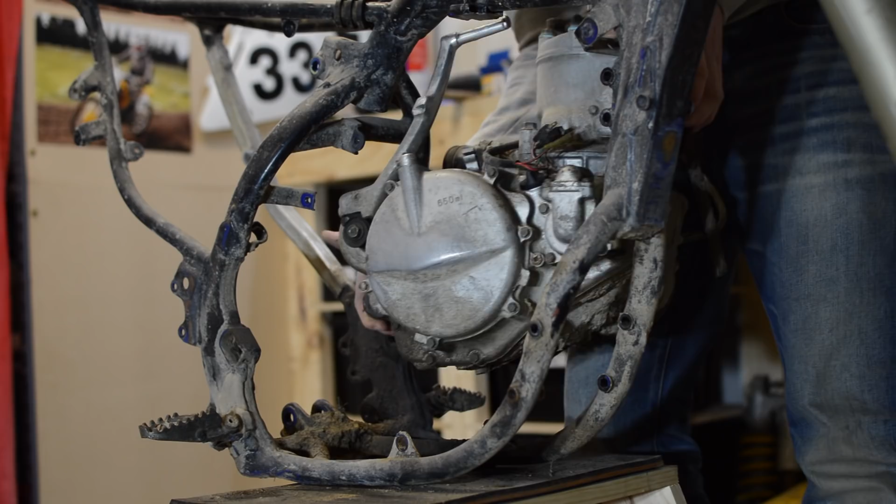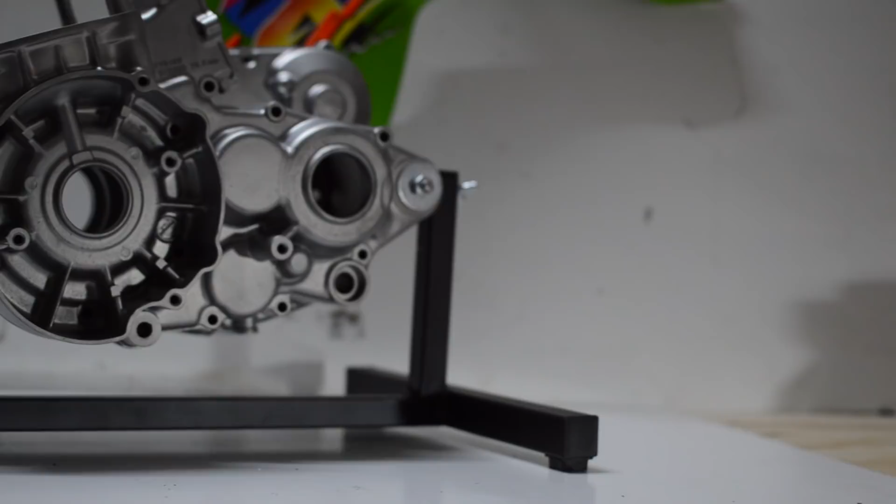In previous videos, the RM250 engine was removed from the bike, cleaned and stripped down for assessment. The cases were hydro-blasted and a bunch of new parts were ordered. A new engine stand was also fabricated specifically for this build. In this video we'll begin the assembly process, starting with the bottom end. Let's get started.

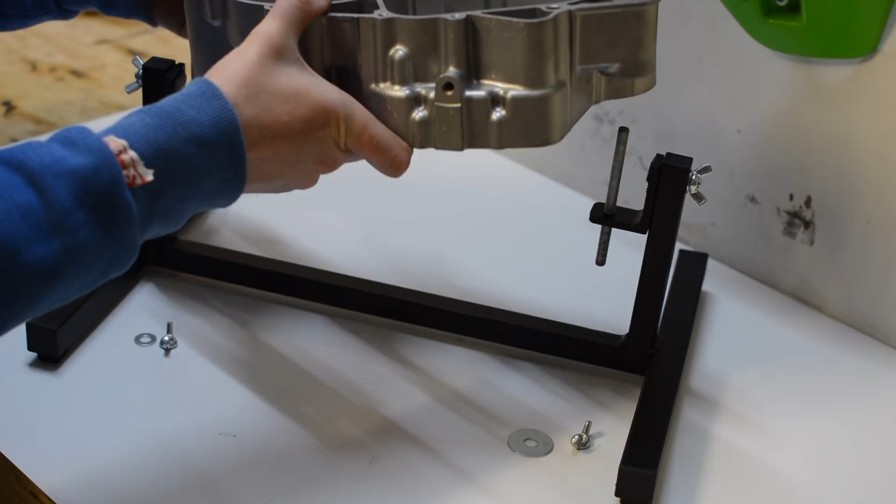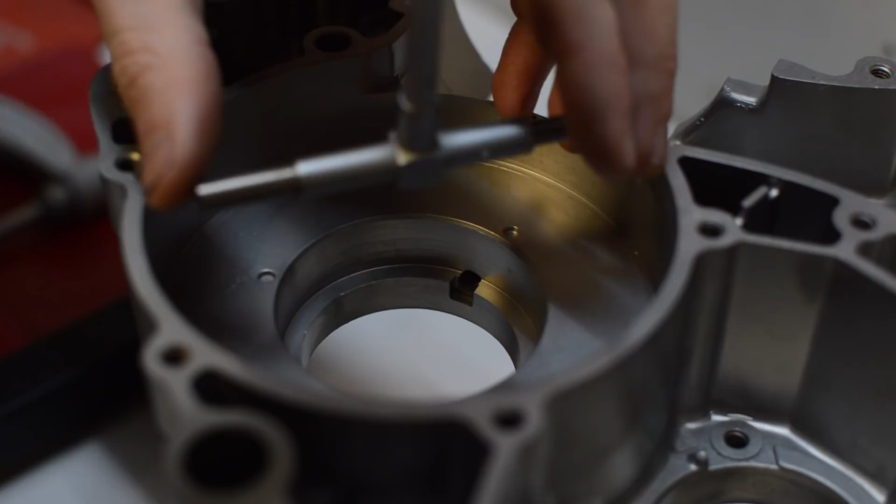Before any of the rotating assemblies can be installed, the bearings need to be fitted to the cases. Most of the bearings are an interference fit. That means that the bearing diameter is slightly larger than the case, but that's under normal temperatures. If we heat the case to expand it and cool the bearings to shrink it, we should get a clearance fit, allowing the bearings to be installed without damage.

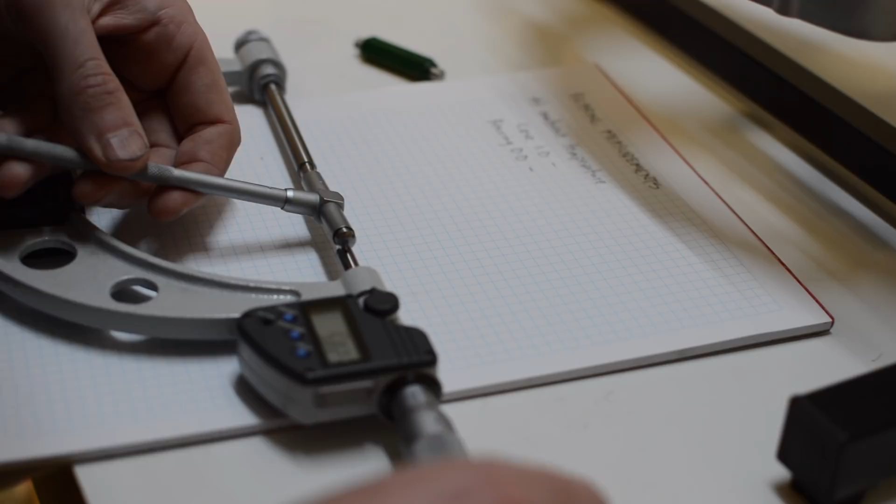I thought I'd take some measurements to prove this theory. At normal ambient temperature, the main bearing housing measures 61.950mm.

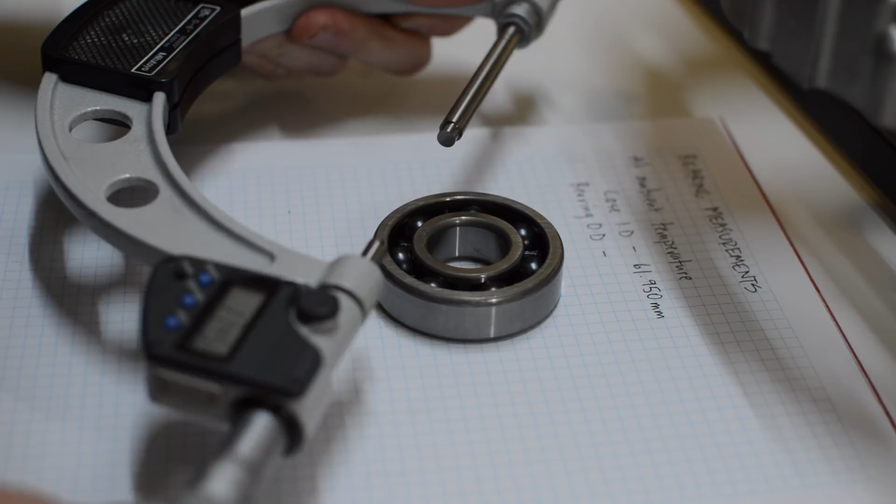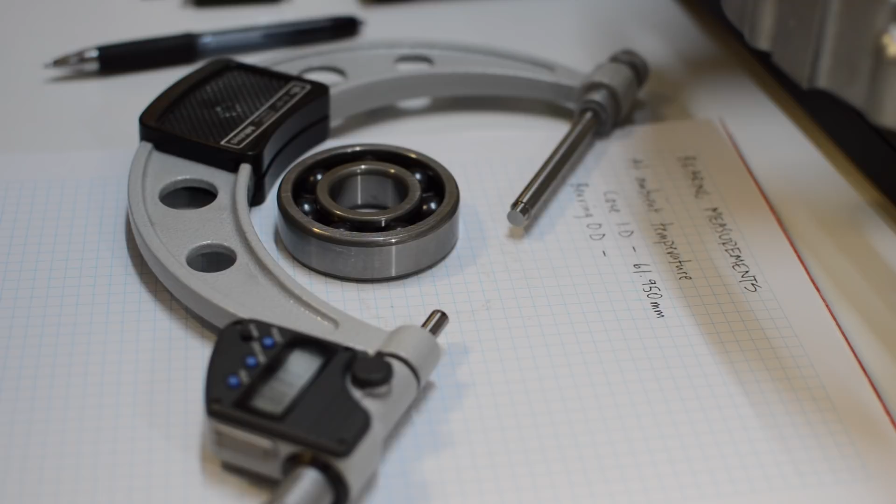A new main bearing measures up at 61.987mm. As expected, there's an interference fit. The bearing is 0.037mm larger than the housing.

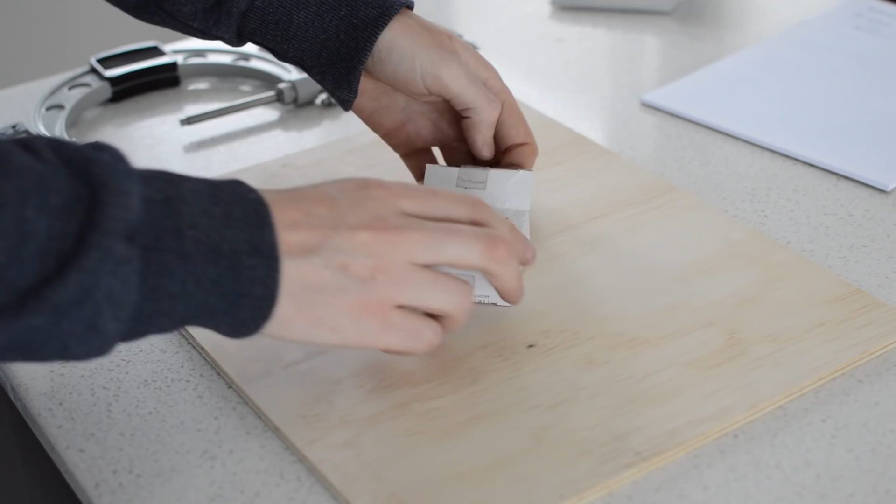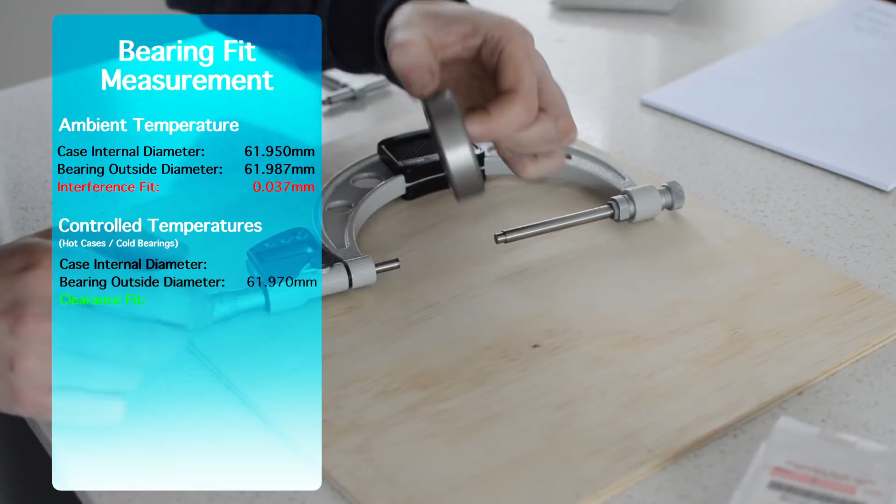After an hour or so in the freezer, I'll take another measurement of the bearing diameter. And this time it's smaller, 61.970mm. It's shrunk ever so slightly, by under 0.02 of a millimetre. And now it's time to heat the cases in the oven, and it's also a good time for a lunch break.

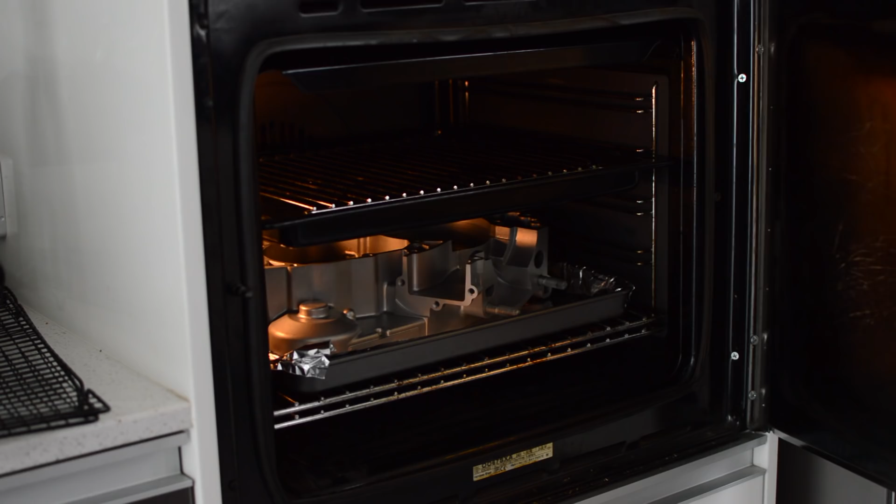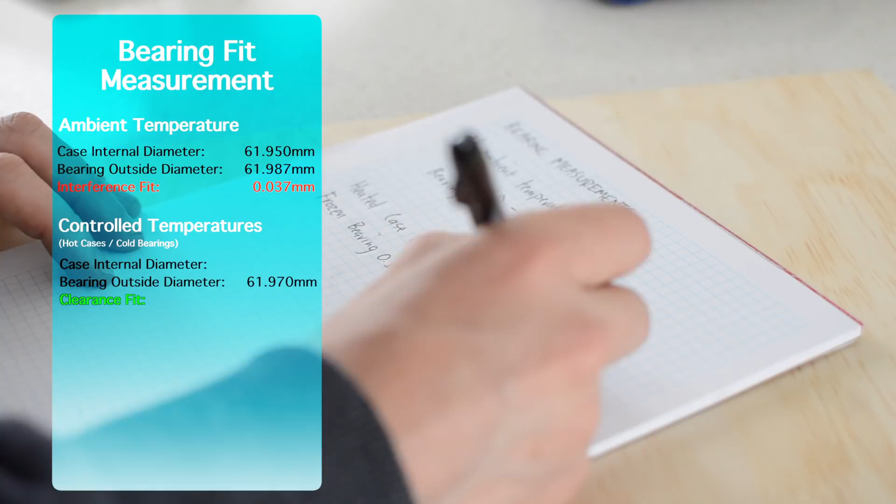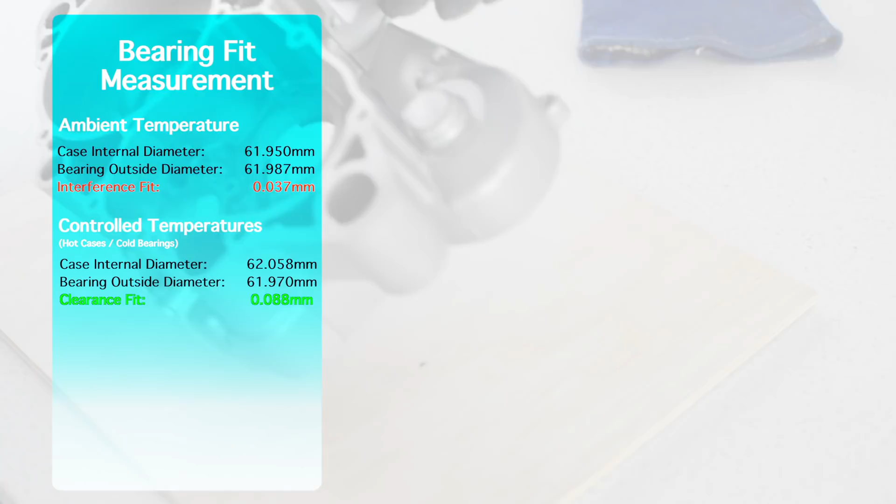Using the oven gently heats the whole case, preventing warpage. I measure the housing in the same way as before, but this time the risk of getting burnt is much higher. At about 100 degrees Celsius, the case measures 62.058mm, a decent increase of over 0.1mm. And that gives us a final clearance of 0.088mm, enough for the bearings to simply drop into place.

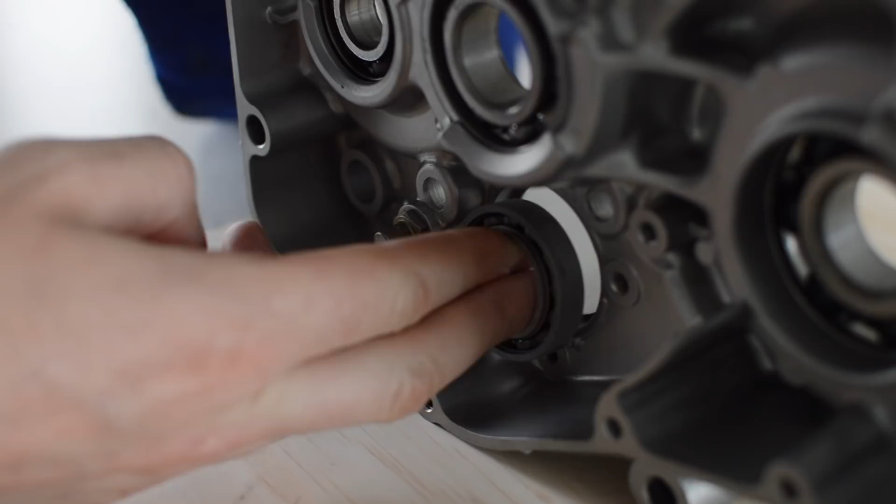Back in the garage, the right-hand case is mounted on the stand, ready for the crankshaft and gearbox to be installed. But first, all of the bearings are pre-oiled.

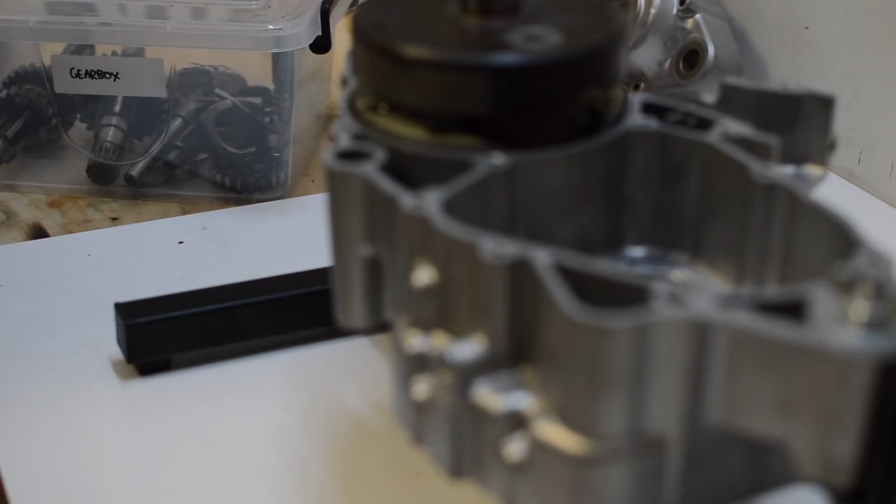Off camera, the crankshaft, along with all of the other reused parts, are thoroughly cleaned before installation. From here, assembly is just a matter of reversing the disassembly process. Care is taken to make sure everything is clean and tidy, and that everything is aligned and operates as it should. And a parts manual, along with a workshop manual, also come in handy.